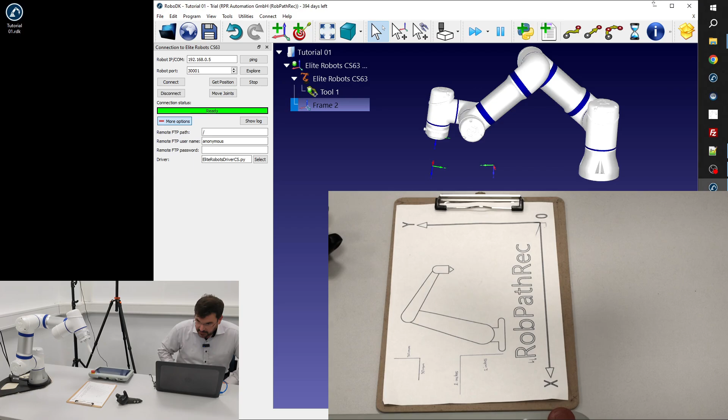Before we move on, I would like to show you how I check if all of these settings, all of these calibrations and definitions, are correct.

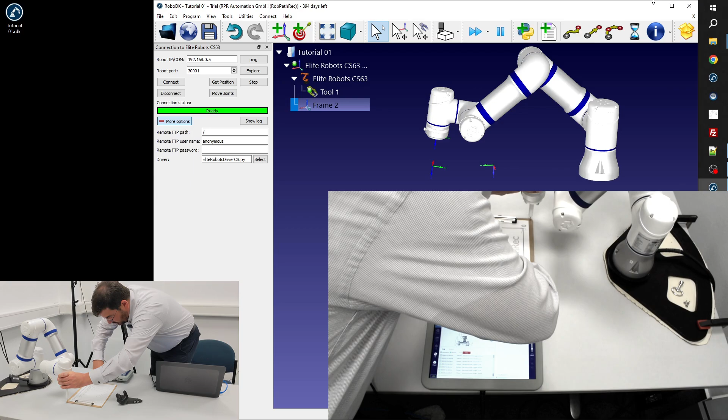So to do so, I will come to the 0 point. Wait a second, let me align on the screen so you can see both of them. So with the free drive mode, I'm just coming with the tool approximately to the 0 position. What I'm doing right now is getting the position with the robot, and here you can see already that it seems to be quite good. However, I will open up with F3 or with the options.

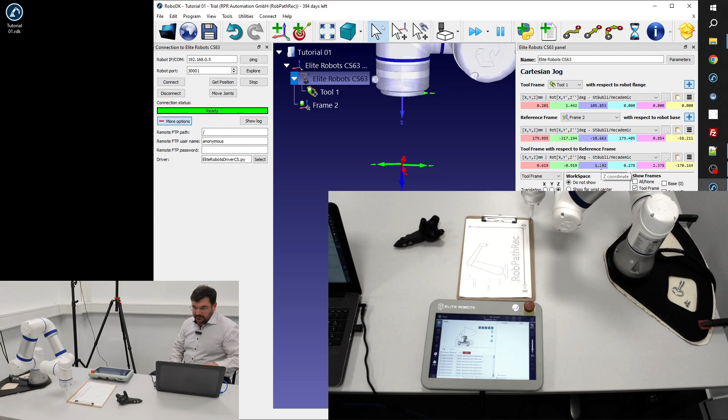This window of the robot, and I take a look at the tool frame. I take a look at this value. So this is the tool frame with respect to the reference frame, meaning the tip of the pen compared to this wooden plate, okay? And here you can see that this is 0.6, 0.9, 1.2. This is not perfect, okay, this can be managed even better. But after a short time, this seems to be a very feasible result.

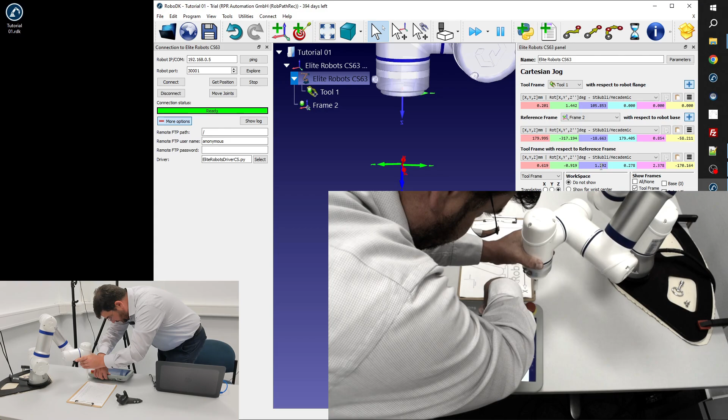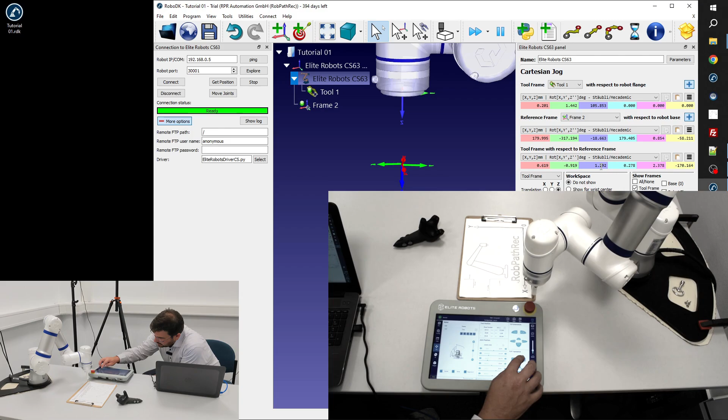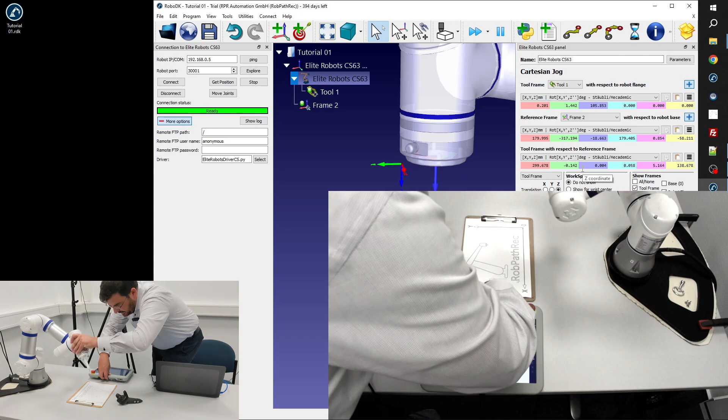If you want to really make it absolutely foolproof, then you can check out the last position as well, which I will finish in local mode with the jog.

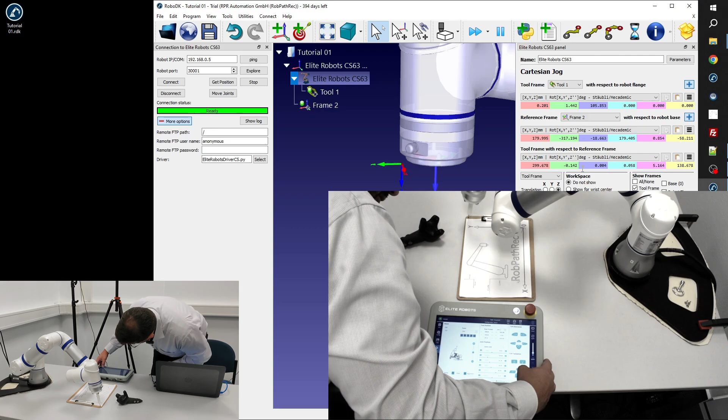Switching back to remote mode, and just updating the position. Here you can see that this is a bigger distance, so this is 2 millimeters inside already, 210, this is correct, and 0 on the Z. So it seems to be everything fine.

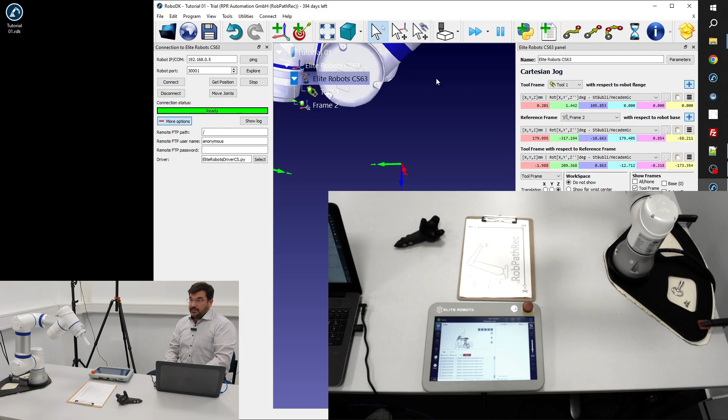There should be 0 here in an optimum world, but nevertheless, for this purpose we are looking for, this seems to be very good. So this was the control section, and then we will continue up. We will teach home position for the robot.